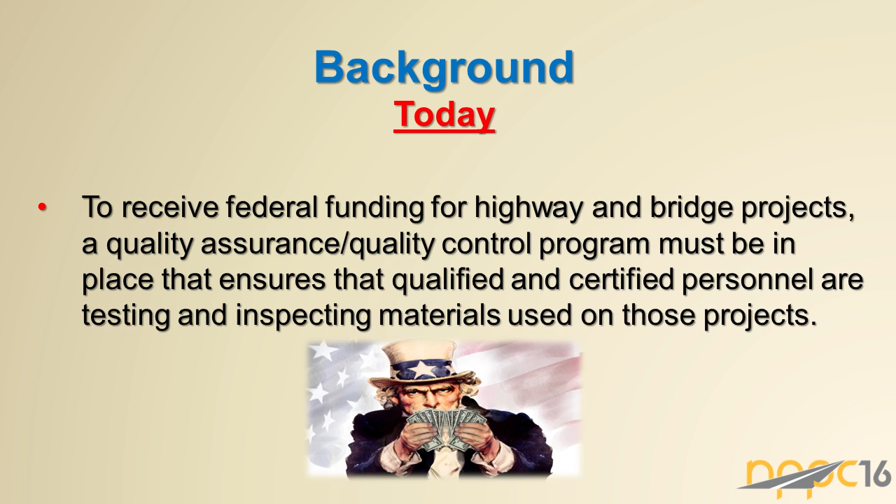So, moving ahead, what's our certification goal? That is to certify personnel that have demonstrated the ability to engage in quality control, and that's the contractor, quality acceptance, which is the agency, and then the independent assurance activities. So it's a big umbrella. We're talking about quality assurance, quality control, quality acceptance, and independent assurance. That will be discussed later on, right after lunch.

There's a good session on quality. But this is really what we have to do. We have to move forward to advance the quality of preservation treatments. So, continuing on with this background, what's the value of it?

Well, first, it reflects a level of achievement. That's important, because this is not just rolling out as a rubber stamp. A person has to meet a certain level to be certified. It establishes credentials. It establishes a benchmark that this person is actually capable of doing the job. It improves the skill and knowledge.

That's what we all need, because I don't know about you, I've had the experience of going out, finding an inspector, and saying, I don't have any idea what they're doing. Now, how can they inspect a project if they don't know what's involved with the actual type of work?

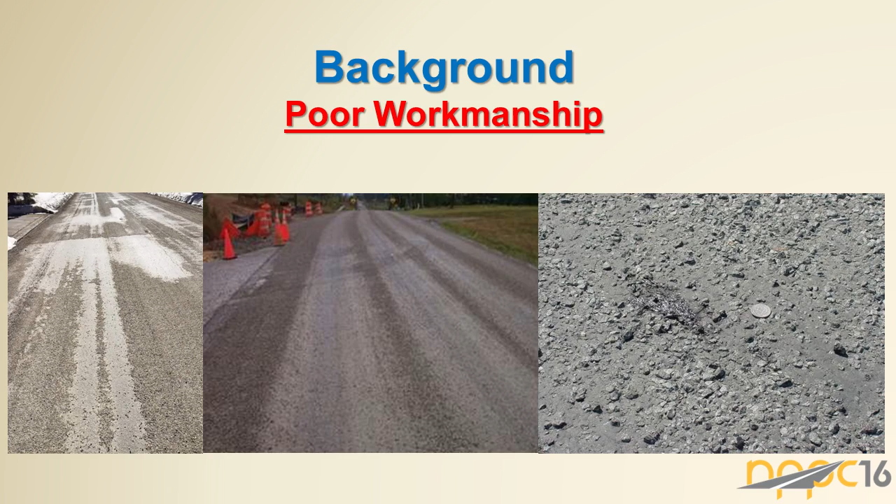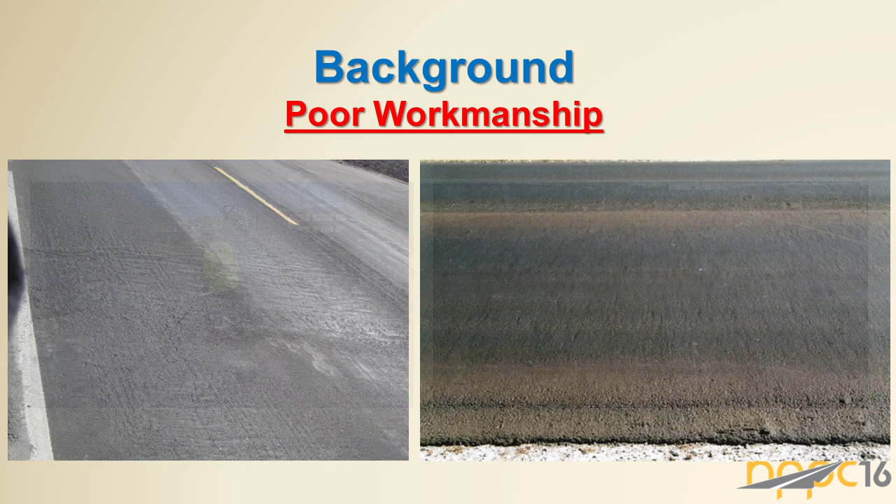We've seen the poor workmanship. Here's a chip seal that's gone south on us. I don't know if you can see that in the back, but we've all had experience with that. This is a microsurfacing that's of poor quality. I think we've seen some of those. And then this is a crack seal or a crack treatment that's totally unacceptable. These are the type of jobs that just turn people off and say, we're not going to do preservation.

Now, we have bad hot mix jobs, but the difference is that it takes you a few years for the most part to determine how bad that job really is. With preservation, it goes down, and we can see we have a problem pretty quickly. And so we need to correct that situation so we have competent people out on the job. So how do we do that? We do that with training.

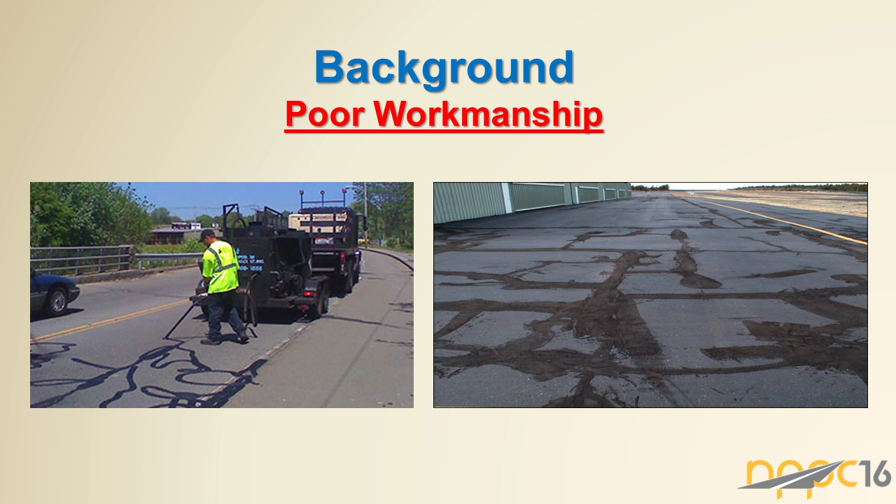Now let's get into the framework, because the framework is somewhat important. We're looking at it in a three-step process. How do you improve the quality of preservation treatments? And the first step to this process is what Casey went through, and that's laboratory accreditation. We've got to make sure that the people that are doing the designs are doing them properly. They're doing all of the tests that are required for the treatments. We're putting the process together in the proper way.

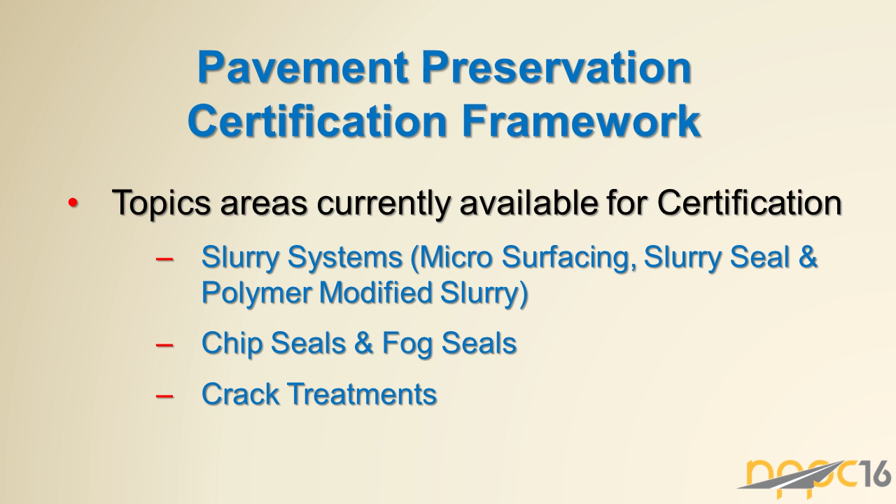So, you're not going to walk in and just take the exam without being prepared. There's a few people in the room that have taken the examination. It's not a piece of cake. We recommend, highly recommend, and as a prerequisite, you take the ISSA online training. It's free, but it's highly effective.

Also, the TC3, that is the AASHTO Transportation Curriculum Coordination Council. They offer training, but that training requires membership. There is a fee to take that training, and so that may set some people back. But I will tell you that the ISSA training that is free is highly effective. That way it prepares somebody to come in and take the examination.

Now, what is covered in the examination? And this is pretty much consistent across the board. First, project selection. Because if we pick a pile of rubble to put a treatment on, it's going to fail. And so that is important. We've got to understand project selection. Second thing is materials, because materials are key to this whole process. Design, equipment, construction, and we're going back to quality assurance. So those are the 6 areas that we concentrate on with this certification examination.

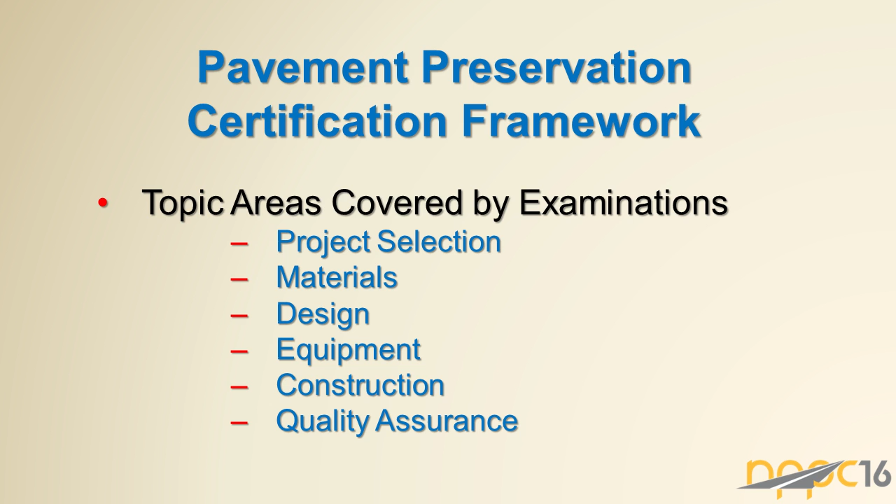So, what's the step? Well, next thing we do is before the examination, there is a review. It's an optional review session offered prior to each examination. It's offered by an expert in the field. Normally, this is an agency or an industry person that does not have anything to gain, you might say. In other words, they're coming into an area that is not their workplace.

So if you're giving an exam in Tennessee, this person may come out of Kansas. If you're giving an exam in Kansas, they could be coming out of New York. So they have nothing to gain to give the training other than to convey the knowledge that they have themselves. And so that's how this is going to work.

Now, the individual that does the training does not train for the examination. And that is a big difference. In other words, they're going to answer questions, they're going to provide an overview, but they do not train for the examination. So it's not a give me. It's to raise the bar.

So, who in the agency do we recommend would get the training, and what's the benefit to the agency? Well, obviously we heard over the last few days that the biggest investment that an agency has is in their pavements. That's where your investment is. And so this will ensure that future investments in preservation treatments will be properly designed and constructed, and that the treatment will perform as intended. The certified people in the agency will serve as the agency's technical experts on that particular treatment. They'll be the go-to people.

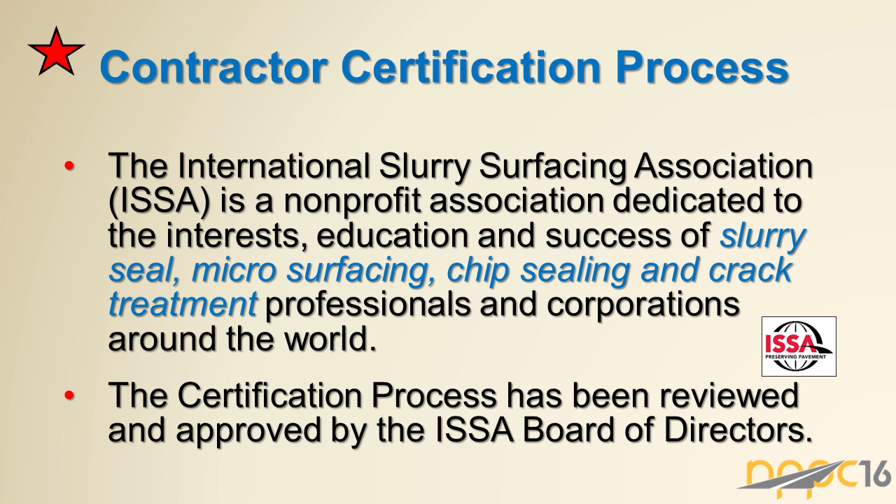ISSA is a nonprofit association that tries to promote, educate, and build success for slurry systems - microsurfacing, slurry seal. We also cover chip sealing and crack treatments. This certification process has been reviewed and approved by our board of directors, and we've worked hard to make it a process that works well for the agency, works well for the contractor, has some teeth so it means something, and is going to do what it takes to get better quality work out on the road.

One thing we wanted to do was make sure the contractor was certified as an entity, so the company is responsible for certification. They need a properly trained workforce, including specific employees that will be certified - we'll go through that in a minute. Most importantly, they need to have and use as part of this process a detailed quality control plan.

To me, that's the most important part of this whole system. Education is important, testing is important, but what I think is best is we have a quality control plan put together by the contractor, and both the contractor and the agency understand the plan because they've both been trained and have certified people. I've done a lot of quality control plans taken to the pre-construction conference, and they go, do you have it? Yep, they check it, and then it's never opened again. Our hope with this certification is that the quality control plan, quality management plan, is used daily on the project.

The contractor company is certified for 1 year, with annual renewal required. The employees are certified for 3 years. For the required employees we want certified - let me back up and say this is written for the microsurfacing industry, so there may be some terminology that doesn't work yet for the chip seal industry and the crack treatment industry. This is a work in progress.

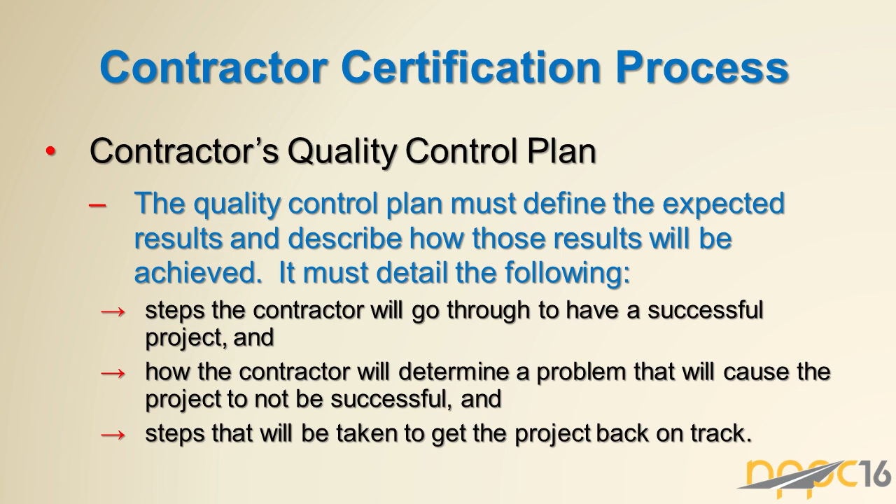It's really useful so that if the contractor says that we're going to test our materials once a day, follow these principles, and use this kind of spreader box, and the state agency looks at that, and then the contractor is not testing the material, is not using that spreader box, is doing something completely different than what's in the quality control plan, they can go, stop, this isn't what we agreed to, this isn't what you told me you were going to do. That's really what this process is all about.

So it'll include quality control testing. Obviously each state may have different specifications, so the quality control plan may just say I'm going to use Tennessee specification and follow those testing requirements, or it may say we're going to follow Tennessee but go above and beyond that. It's how the contractor wants to write it. It'll have the list of materials to be tested, the tests that'll be conducted, location of sampling, all of that will be in the quality control plan.

It'll talk about the mix design. It'll say that the mix design will be done by an accredited lab. It will list the tests that'll be done on the mix design, and the verification procedures that the contractor will use to make sure that his mix meets the mix design.

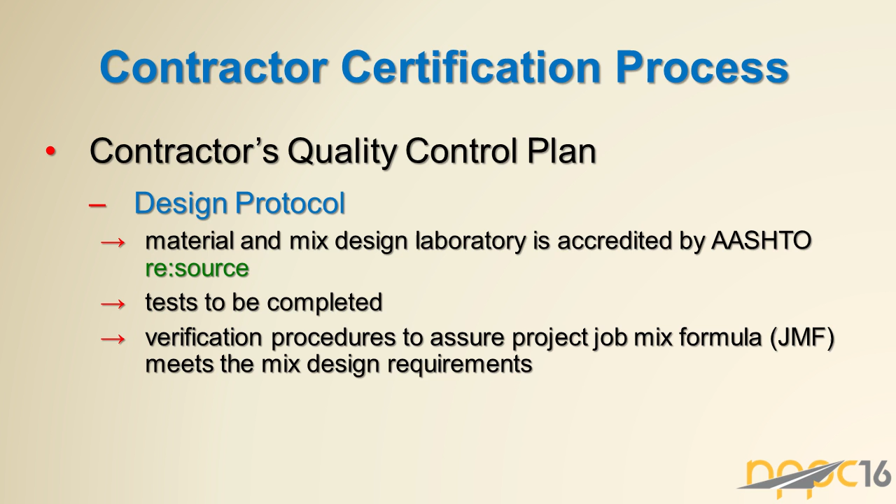And then inspection and control procedures for the contractor. How are they going to view the project to begin with? How are they going to make sure the road is clean, it's been patched correctly, that the road is ready for surfacing? How are they going to do that? How are they going to pull onto the job? When are they going to calibrate? Who's going to calibrate? How is calibration going to work?

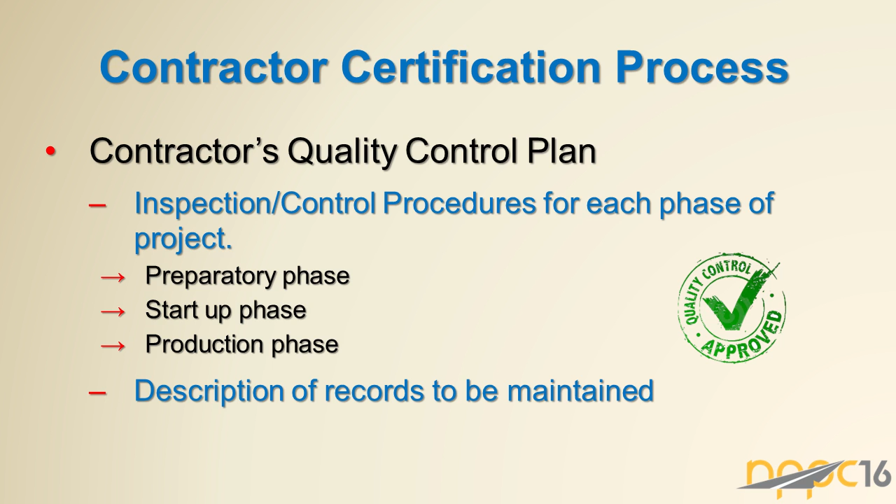And then the production phase. So it should lay out exactly how that contractor is going to build their job, so the state agency and the contractor are both on the same page. And that'll describe what records are to be maintained.

So certification, the training and testing portion of certification for the individual contractors will be valid for 3 years. That certification is portable, so if a contractor or an employee works for contractor A and is certified, and leaves that contractor, he carries that card with him or her and goes to his next job and is still certified. The examination consists of 80 questions.

It focuses on pivotal knowledge of what this person needs to know to be able to produce a quality microsurfacing, chip seal, or crack treatment project. A passing score is 70% or better. This test is not easy. It cannot be. I guess someone could watch the web-based training, sit through the training session, and pass the test without any knowledge, but it would be very difficult to do that. So this test is a good solid test of knowledge.

So we ask that there's a certified superintendent or trainer that is management level in the company. We want them to directly oversee no more than 3 projects at a time.

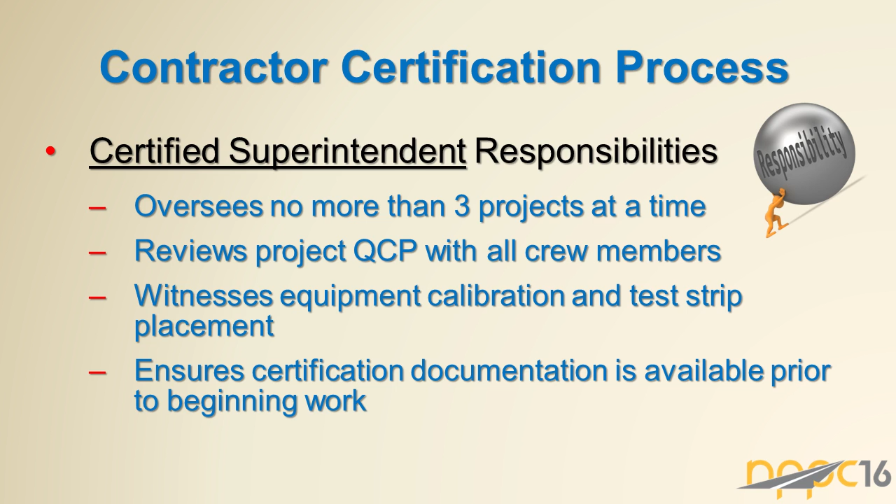They review the project quality control plan with all the crew members, witness the equipment calibration and test strip placement if required, and ensure the certification documentation is available prior to beginning work. This is, again, a management level person in the corporation.

The foreman's responsibilities: he's managing 1 project at a time. He's in control of the project. He makes certain that the quality control plan is carried out. He witnesses and performs the calibration and test strip placement, and ensures the documentation is done on a daily basis, whatever's required in the quality control plan.

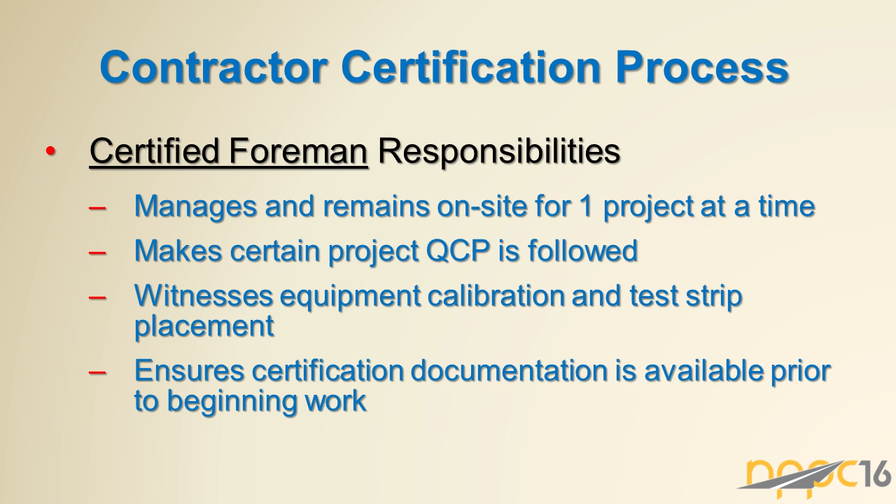And then the certified operator is just there. He's trained, making sure that what he does on the back of that machine or equipment is putting the correct treatment, the correct quality materials on the road as designed in the quality plan.

So the contractor applies, has his quality control plan checked, has the employees trained and tested. Their name is entered in the database at NCPP. They're given a plaque for a year that says we're a certified company. The employee names are put into the database, so an agency can check that this person is certified. If they don't have their card with them, we can go online and still check. That gives the agency the knowledge that this contractor is actually doing what they say they're doing.

Now, in order to have a certification program, there has to be some teeth in it, and so a contractor could be decertified. Now, it doesn't mean if a contractor has a bad job or makes a mistake that their certification is going to get pulled. All contractors, all types of construction treatments have problems. But if a contractor falsifies documentation, if they don't follow their quality control plan, if they're not following the rules of the certification, they can have their certification pulled.